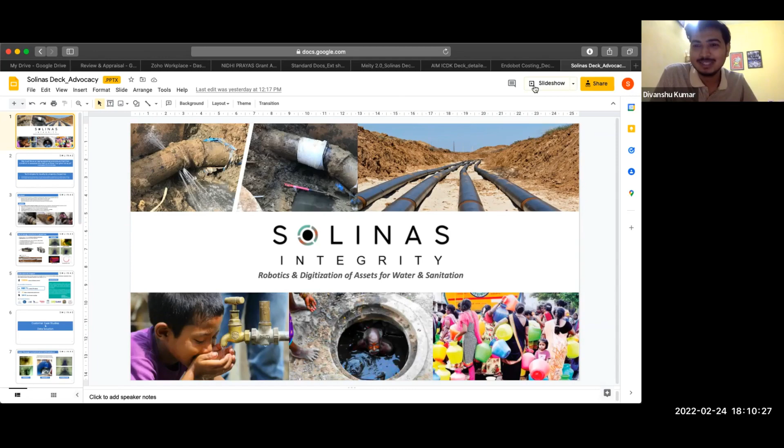Ashok Natarajan himself had shared an article where he mentioned that the total supply that is happening is about 110 crores, but the actual receivables is only 60. So almost half of that is actually getting wasted in leakages and so-called theft. And that is by official admission. The actual numbers could be even more than that. So that is one of the key things that we refer to when we try to understand how do we actually make it work.

So just to give an introduction about ourselves, the company that I run is called Solinas Integrity, and we are into robotics and digitalization of assets for water and sanitation. It primarily comes from our thought process that one, pipelines and these sewer networks, septic tanks, are everywhere. Every person who is there in the city is associated with that in some way or other. And so far, we have been managing it only in a manual manner, whether it is cleaning, inspection, and so on. It's just done manually without any leverage of technology.

If you look at the developed country markets, they have very established protocols on how these inspections and cleaning need to be done, but we have not adopted that so far. That is one. Two, we are still a very procurement-heavy country in terms of these assets rather than maintenance. So if you have pipeline networks built in the city and you start having problems, leakages, and the NRW increases, instead of identifying in a data-driven manner which pipelines need to be replaced versus retained, you just start a contract of replacing the whole network itself. So these are the things that we really want to work on.

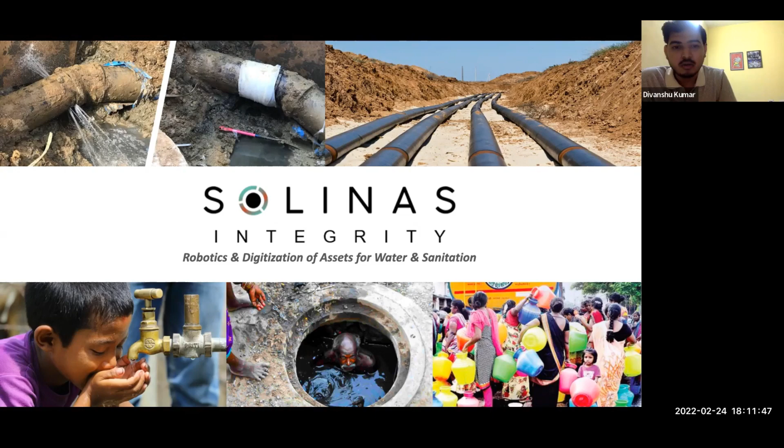So I was very fortunate to be a part of the post-budget webinar that happened yesterday, where the Ministry of Jal Shakti was talking about how the state is reducing non-revenue water, and they have this campaign called Har Ghar Nal Se Jal, which essentially means how we can reach tap water in every house. And one key thing that came out was that the laying of pipelines will be critical, and how do we manage these pipeline networks. So the majority of my conversation today will be focused on the pipeline, and I'll very briefly touch upon the other work that we're doing.

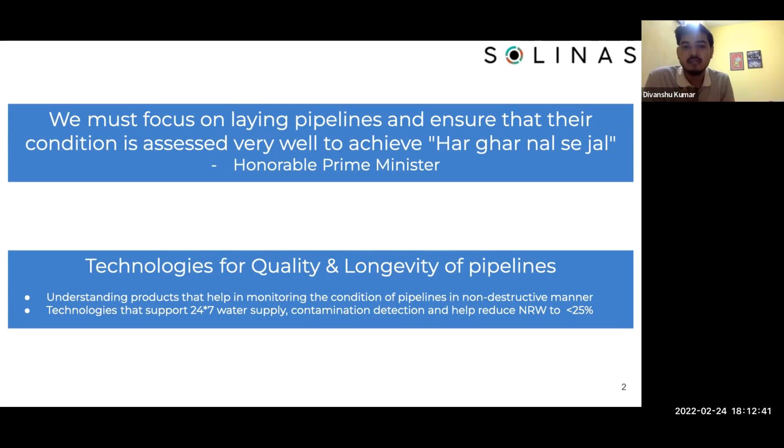In this, the Honorable Prime Minister himself mentioned that checking the integrity of these pipelines and their regular condition assessment will be most critical for us to achieve this mission. And that's what I'm going to focus on today: what are the technologies and products that we can use to help us achieve this? So this is the context, like I said.

One, we have a lot of existing water networks, and as per the official data, we have to expand more than 1.3 lakh kilometers of pipeline network over the next 5 years. The other thing is that increasingly smart city networks have started to look at data-driven measures to understand what pipelines need to be replaced versus retained, rather than giving a blanket order of replacing all the pipelines.

And the other thing is that people have been talking about 24/7 water supply, becoming a 24/7 water supply nation. The leaks and contamination points that we generally have need to be resolved very quickly and detected accurately in order for us to do that. Because otherwise, generally if there is a problem in the water supply, people would take 2-3 days to resolve it. Until that time, there is no water in the supply. That is the general challenge that we see, and I just wanted to share this context, and the majority of you would be aware of this because this is a similar context in every city.

So what we want to see is, how do we leverage technology to actually help us reduce non-revenue water, have very early detection of leaks, and do quick resolution? How do we reduce this whole manual effort in doing so?

So to give an example, let's say there are contamination or leak complaints that come from a neighborhood. The current existing work that people do is a jugaad solution, where they will try to identify from which house the contamination complaint is coming and where the contamination complaint is ending. And they will have this 100 to 200 meter area where they would dig multiple pits to identify where the problem could be. However, this is a very inefficient way of doing it.

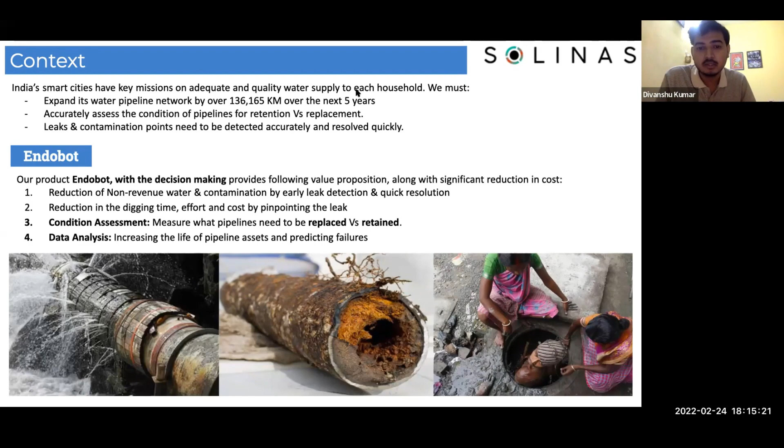Now, this is the product that we have developed. It's a pipeline inline inspection robot that can go inside any pipeline above 70 mm in diameter. And the idea is that we have a camera which is able to record the entire pipeline. It's actually just like having an eye inside the pipeline, so that you're able to see the challenges that are there.

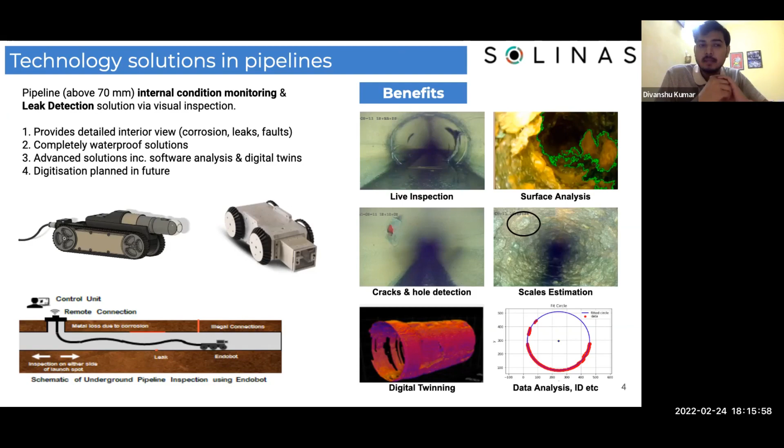You can also see the corrosion that has happened. You are able to estimate the percentage of scaling, and thereby you will be able to take a data-driven decision on whether this pipeline needs to be replaced or whether you need to retain the pipeline. So this is something that we are able to do.

And in terms of actually coming to the data point that I was talking about, one of the things that we have seen is for every kilometer of inspection that we are able to do, in direct cost itself, we are able to save about 7 lakh rupees for the municipality because of the digging, labor, road construction, and all of that cost that is there for them.

And the other thing is that typically, even if we are able to find about 5 to 6 leak points or contamination points, that leads to a saving of about 500-600,000 liters of water every day, because of the pressurized pipeline that we have. And this we have estimated based on the 8-hour supply of water that is there. So this is what we have seen so far based on the 10 to 15 kilometers of inspection that we have done across various cities.

And we feel that this number will even become better as we develop better technologies. Because right now, our technology has some limitations in terms of how fast we can do the inspection, how long we can do the inspection, and so on. So as we leverage better technologies to do this, the cost savings will become even higher, and the savings of water will also grow.

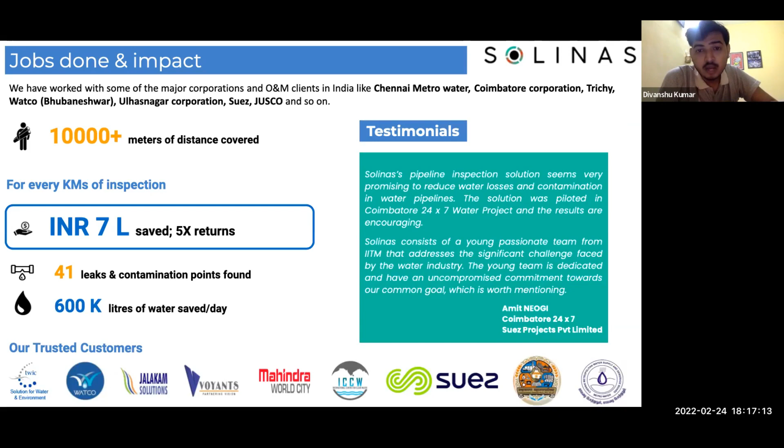So I want to just show a couple of case studies that we have done. This was a case study we did in Chennai and Coimbatore, where you can see the condition of the water pipeline that was there. And to give an instance in terms of data, the total internal pipeline diameter was about 160 mm, but what remained after the sludge and scaling formation was less than 100, probably about 80 mm or so. That was the condition there.

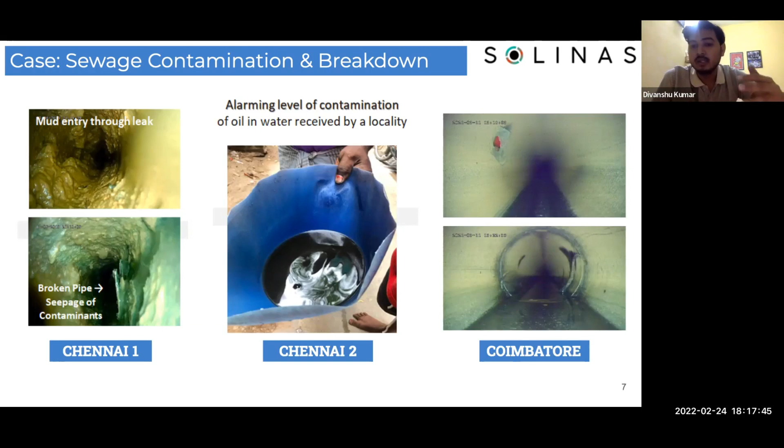A couple of things: you can see where the gaskets are coming out, and because of that rubber and everything, the water is getting polluted. So these were the couple of things that we noticed there.

In our Trichy inspection, we saw that in a water pipeline there was actually a presence of sludge, because there was cross contamination. In the majority of cities, we will have water pipelines and sewer lines running in parallel. Now, you do not really know where the contamination has happened and for what reason. So if you're able to see these broken pipe sections and even some silting or seepages, you will be able to identify where the problem could be coming from. This was one thing that we did.

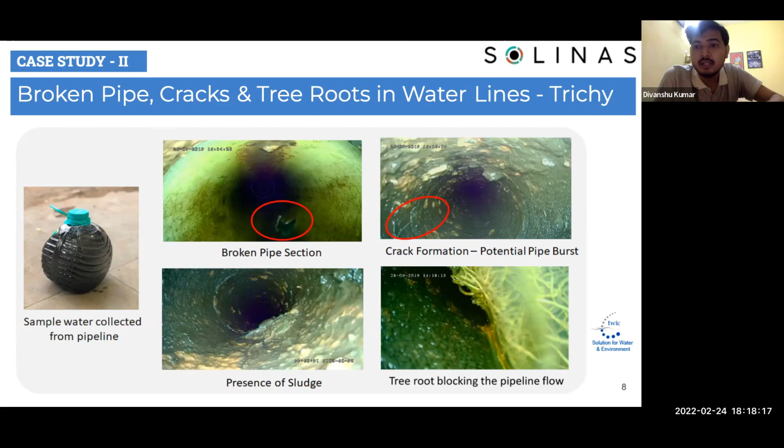Then we did something in Bhubaneswar. Bhubaneswar was quite shocking for us because this was a very newly laid pipeline. The pipeline was just laid about 5 years back or so, but within that, we were able to see a lot of stones. And this was later confirmed in Coimbatore also. It's something we are trying to identify: what could be the reason that we have so many big stones present in the network.

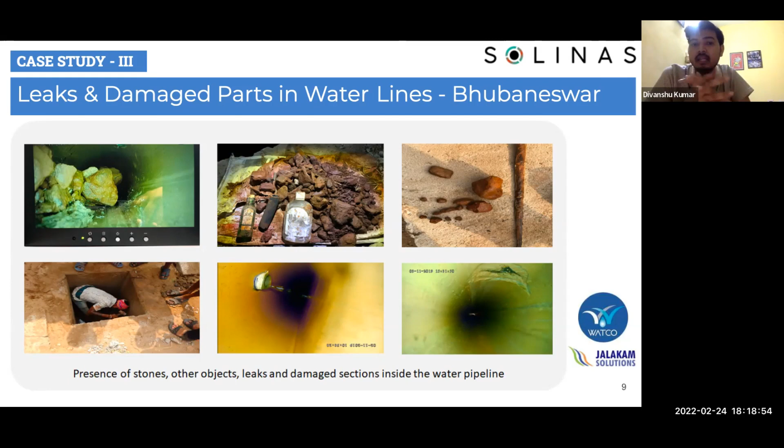One thing that we got to understand from the chief engineer was that probably because they sometimes dig the pit and don't close it immediately, unwanted material could go inside the pipelines, and they never know what the condition of the pipeline is, so they never really predict it. So this was a challenge that we saw there.

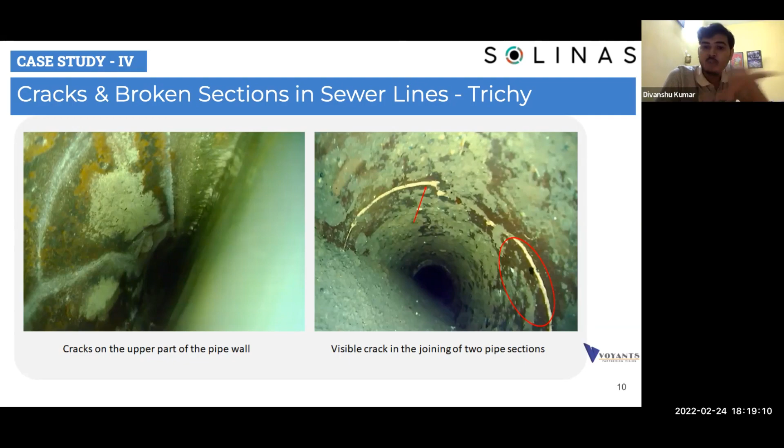This was another seepage issue that we saw in a sewer line, where the walls had started breaking down, and the sewage had actually started going out of the pipeline into normal groundwater and contaminating it. That was another challenge that we saw there.

A couple of other ones that we did was a tree root penetration, primarily blocking the complete sewer line flow. This is quite common in sewer lines because the sewer content is quite nutritious for the trees. So they tend to break the pipeline, get inside and restrict the flow, in which case, even though the pipelines were laid 5 to 10 years earlier, they see a lot of constriction and blockages in their flow. So we were talking about how we can solve those challenges as well.

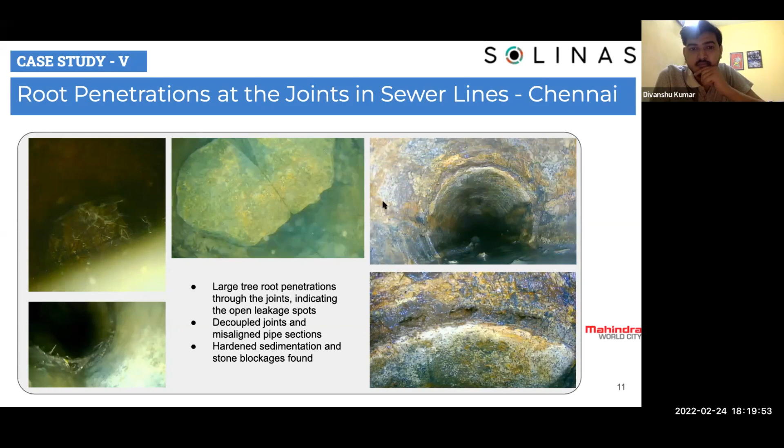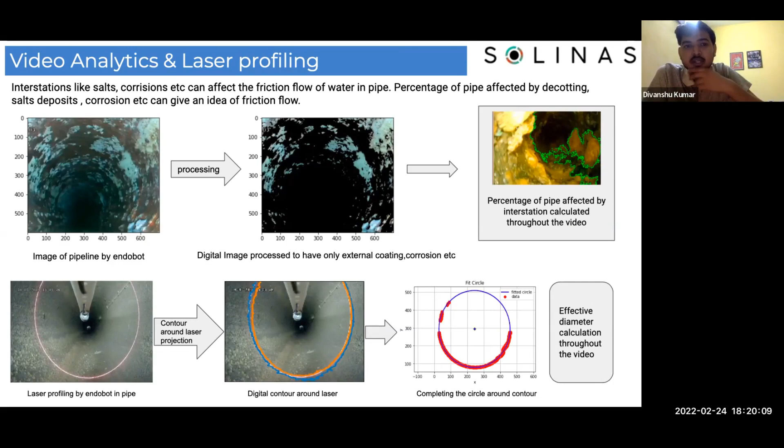So yeah, this is a bit on the technology side, where we are working on laser profiling and further analytics to identify, like, what is the effective diameter that has reduced, the percentage of corrosion that has happened, and so on. So this is a work in progress. Apart from that, what else? So this is about the water part that we are doing.

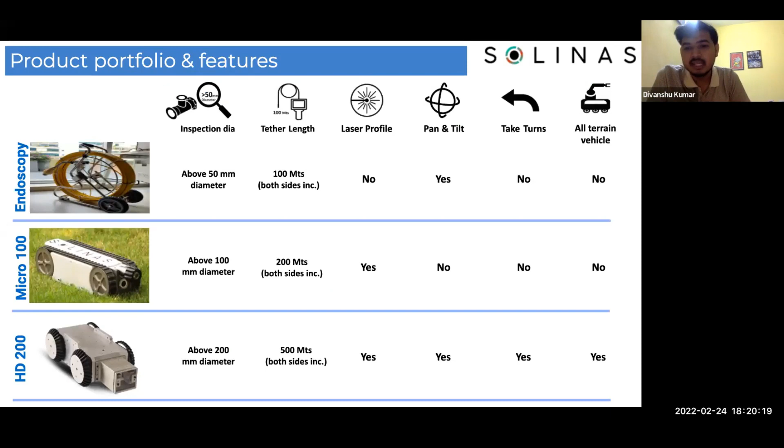I will briefly talk about the sanitation work that we are doing also, which is developing India's first robot for septic tank cleaning, where we are developing a cutter and a suction mechanism through which we will be able to clean any septic tank, whether it is a household septic tank or an industrial septic tank. We have developed the whole thing keeping in mind the Safai Karamcharis, or the manual scavengers who operate it themselves. We have made it so easy to operate that whereas earlier they were doing it manually, now they can just operate the tractor and clean the septic tank without having to deal with the sludge.

The product is already built. We are thinking about deploying it and giving it into the hands of Safai Karamcharis after a week's time. So that is a work in progress. And we will be distributing about 10 of these robots over the next 3 months to various groups of Safai Karamcharis.

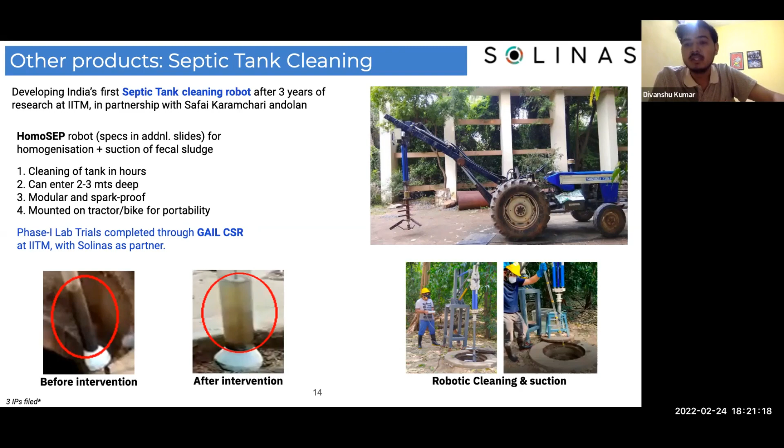So yeah, then a couple of things about our team and the work that we've done overall. But we're happy to take any questions because I've already crossed my 10 minutes.